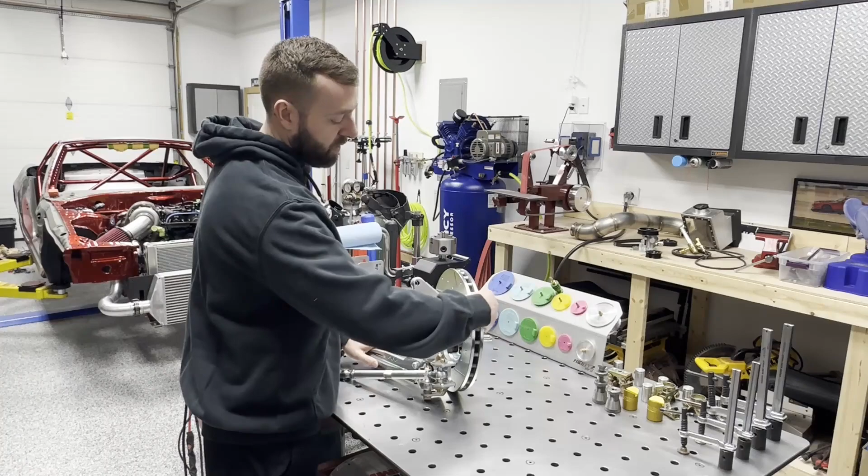So the configuration I have set up right now is an FTF angle kit with their 350Z hub bearing setup welded on there. When they designed this, they retained the factory caliper mounting location. So in theory, it should be identical to an RX7 FC knuckle and should work for both cases. The only difference being that the RX7 knuckle or spindle is a smaller hub diameter, so you'll have to run a hub-centric spacer. But in either case, I have both versions here, so I'll test both.

But the first step in new product development is we need to get all of our parts, and we need to get all of them scanned and into CAD. So I've got my assembly here, rotor onto the knuckle, and I'm going to scan this first, then I'll pull the rotor off, scan it again, and then I'll wait for those calipers to show up, scan those separately, and we'll get everything in CAD at once.

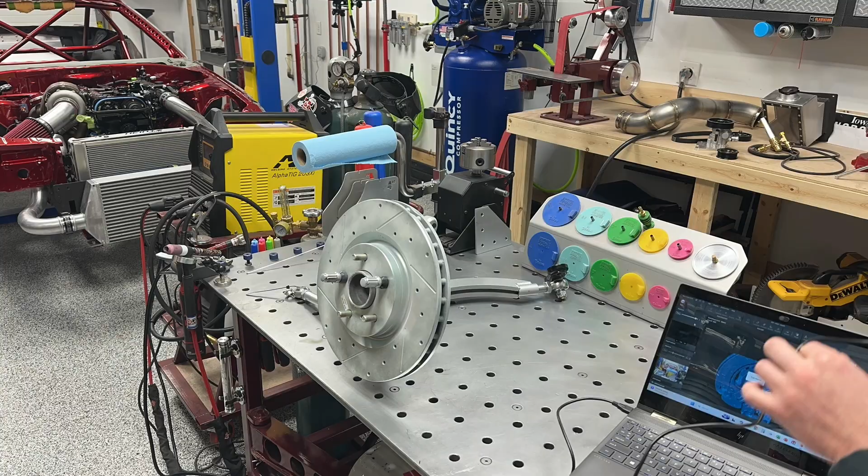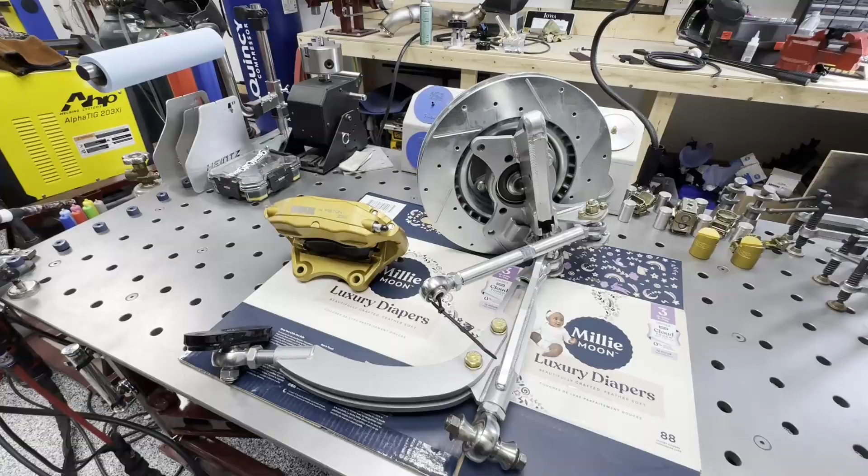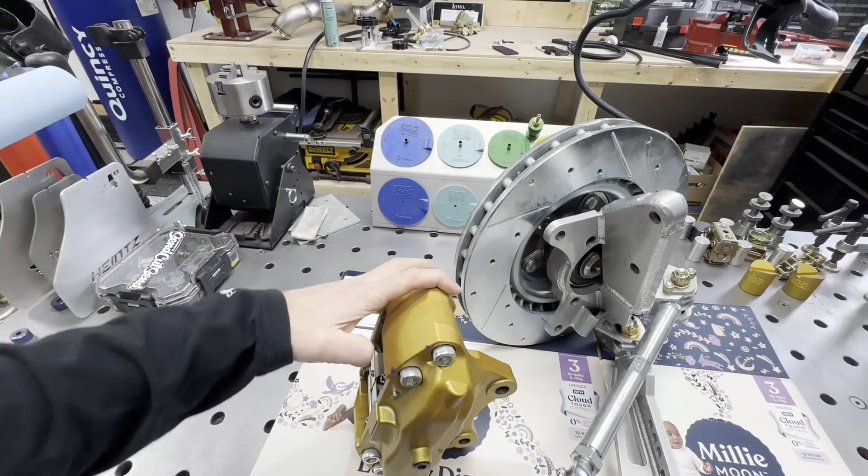We are back with some Z33 4-piston Parts Shop Max calipers, and I've already done a fit up, and this is just how new product development goes. Sometimes you have an idea and you don't know whether it'll work or not until you get into it, and that's where we landed here. My initial plan for these calipers, ignore that I've got the bleeder on the wrong side, was to try and get right in between the factory location.

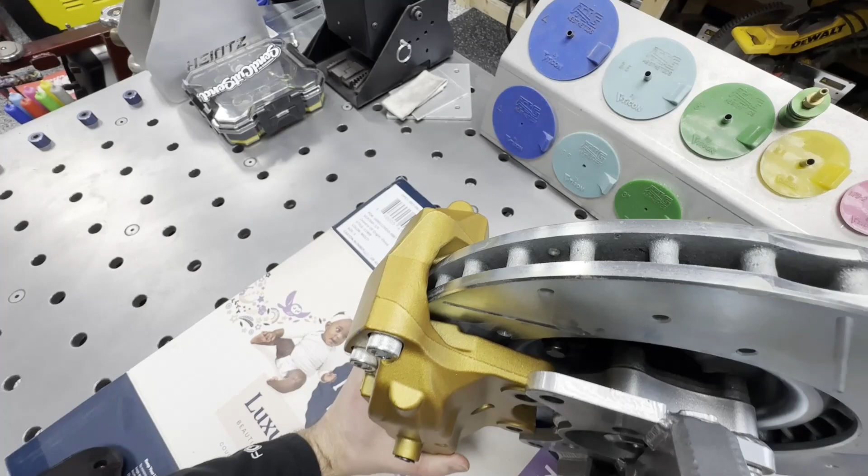My measurement was close just by pictures that I've seen, but it's not close enough. It looks like that's got quite a bit of pad contact, but it doesn't. There's still a fair amount, at least 1/4 inch or more. These have to be pretty recessed in there.

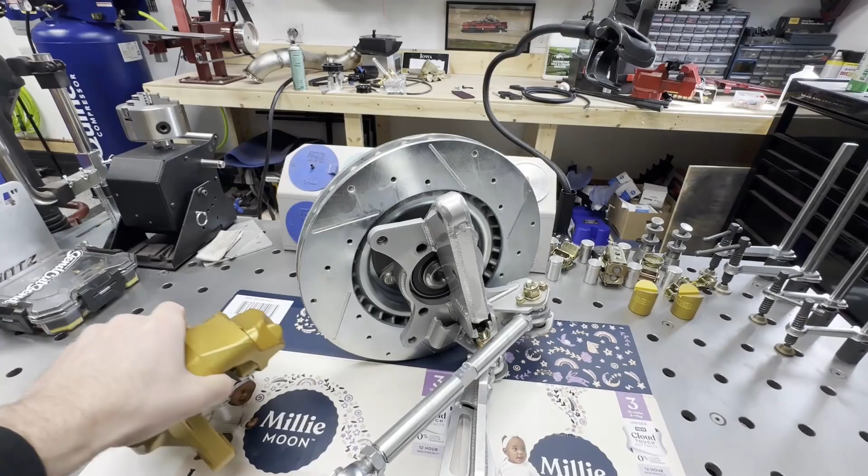So unfortunately, knowing this, I'm not going to be able to offer this to people with a factory RX7 knuckle. If there's not enough room to mount it using the existing brake caliper mounts, I'm kind of stuck. Thankfully, this is an FTF knuckle with a 350Z hub, and I have a couple of extra pickup points that I can use. So I'm not completely stuck, at least for this application, but when you lose 90% of your market because you can't use an OEM knuckle, you're kind of SOL.

So I think this will probably just be a personal project now. I have these calipers in order to develop kits for other chassis. But we're going to keep moving forward to figure out a solution since I already have all the parts for my car, and see where we land.

But what I'm seeing here is that I'm going to need to pick up on these two 350Z hub bolts, and the top one is very close to this wall and this weld. So that means I can't just pick up on those two.

This one would have a super thin wall with bolt hole tear out risk because of how close it is to that weld and how small that wall would end up being. So I can't just use these two. I'm going to need to add a third, I think just on the OEM location in between. So this is 3/8 plate.

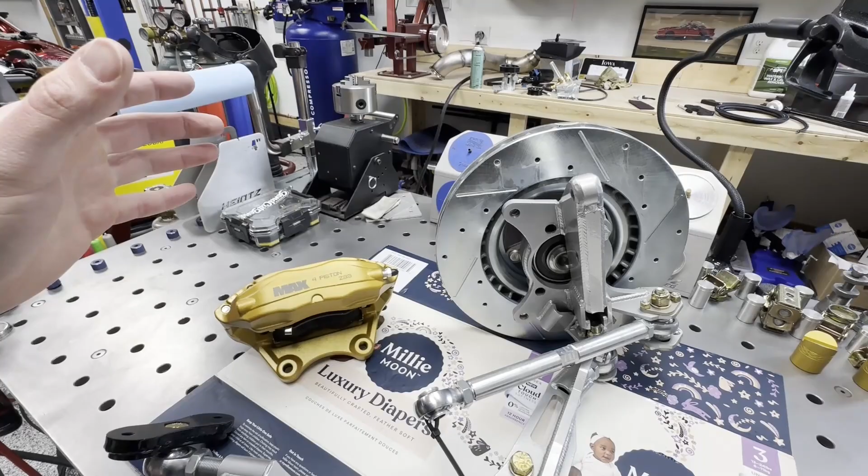I think what I'm going to do is find the perfect middle ground after cutting off this tab for clearance to get this thing where I want it, and then end up drilling and tapping an M12 by 1.25 somewhere in here.

So first step to figure all that out, where everything lands, whether I even want to come up versus coming down. I'm guessing in CAD it's going to be a lot more reasonable to bring the caliper up rather than down towards, you know, where things can possibly impact. So yeah, first step is just getting this thing all scanned up.

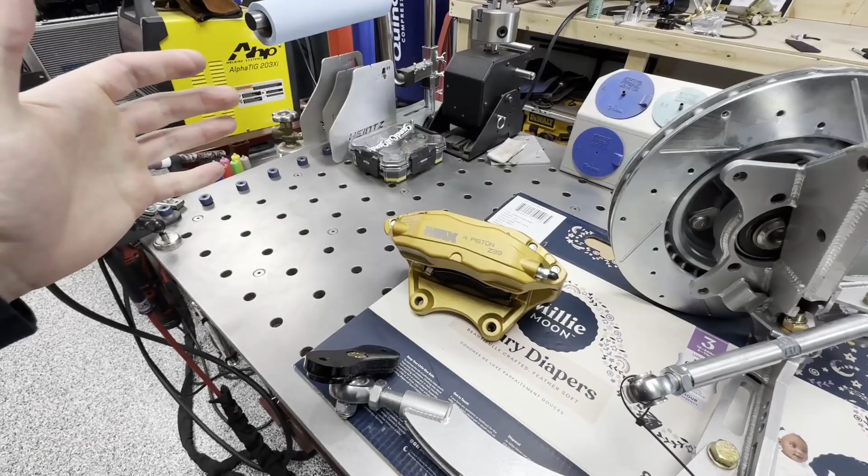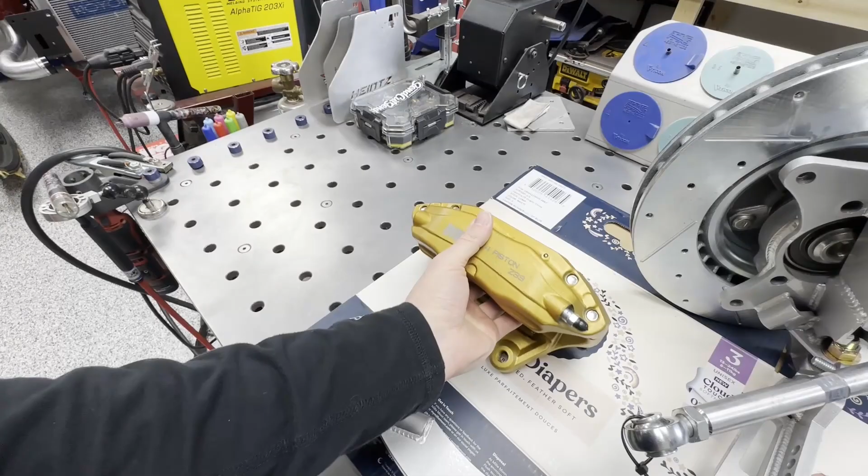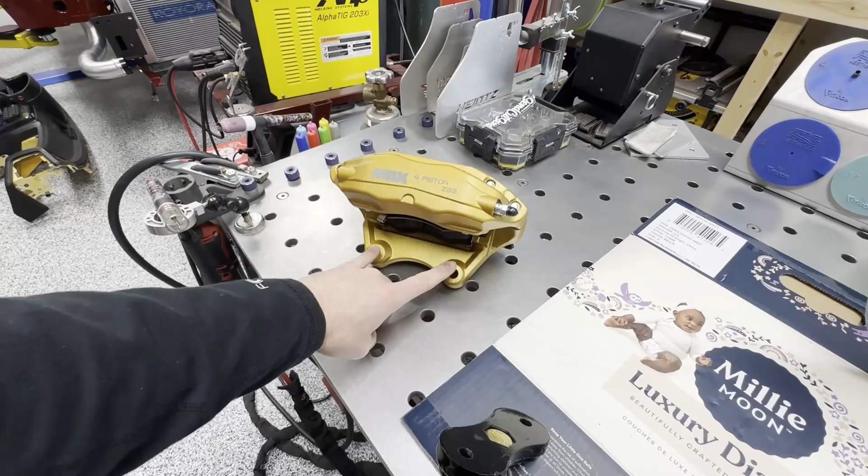And to save time, I'm not going to cover all of that in great detail, but for something like this that's fairly complicated, I'm not even going to spray this with 3D scanner spray, and I'm going to do it in at least 2, maybe 3 scans. First step is just positioning it to where I can see these 2 bolt holes. This is the thing I care about the most, and it's an easily identifiable feature for the 3D scanner.

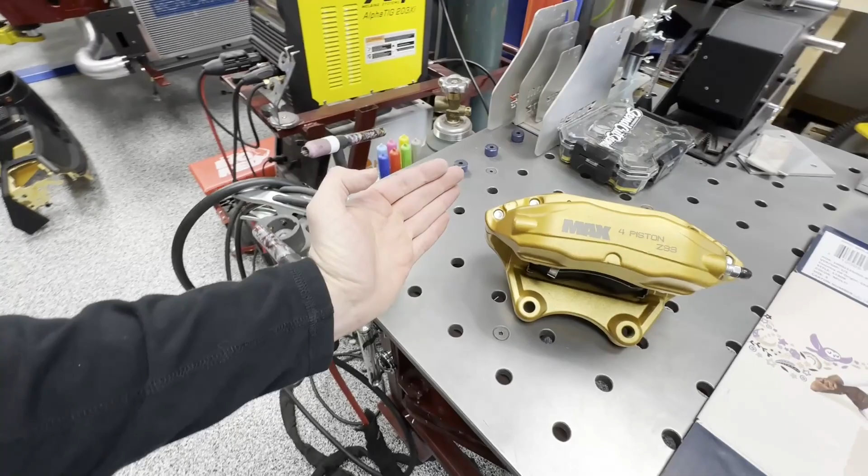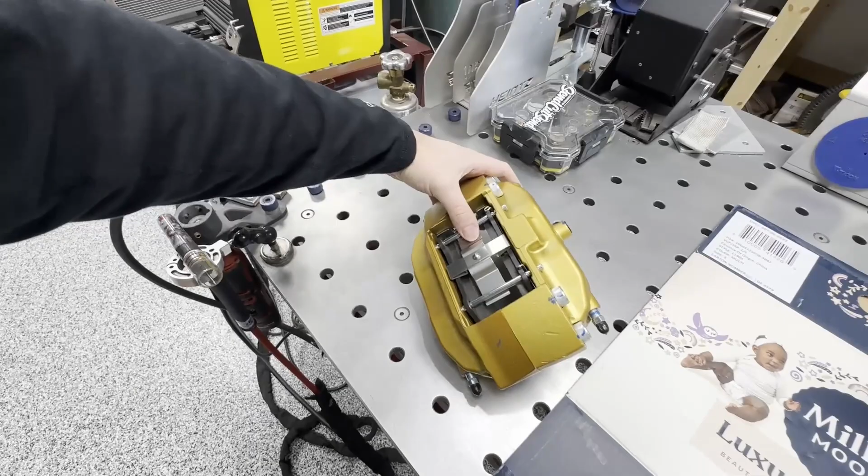So I'll scan this side and capture as much as I can in one pass like this, and then export that. I'll probably do the same thing from the back side. Come from here, trying to capture up and down and over, and then if that's not enough, I'll go ahead and do maybe one more, like this, where I can try and capture the overall width between the pads.

And then the way that I'll handle that in SolidWorks is on all 3 scans or 2 scans, I will put a boss that is located on these 2 holes. Then I'll align them with that. And I can create planes on both sides here and compare that to what it physically measures out at. That way, all 3 scans perfectly align.

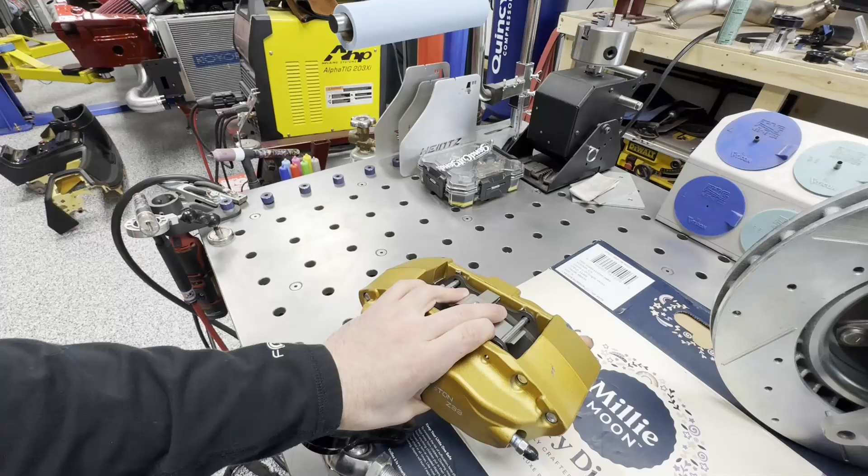Depending on the scanner you have, some of them offer excellent features to do all of that for you, but this is the nitty-gritty way of doing it to account for a cheap scanner. So let's get that scanned and figure out some solutions.

All right, we're now over to the PC. We've got our 3D scan of the caliper loaded in, and if you follow the feature tree on the left, you can see this is scan 1. And like I mentioned, I like to work with multiple scans on something like this. It's a cheap scanner. It works better when you just take a single pass from one orientation and stack your scans up rather than rotating the part around a bunch and relying on feature tracking. And I was struggling to capture it all in one scan anyway, so this is my process.

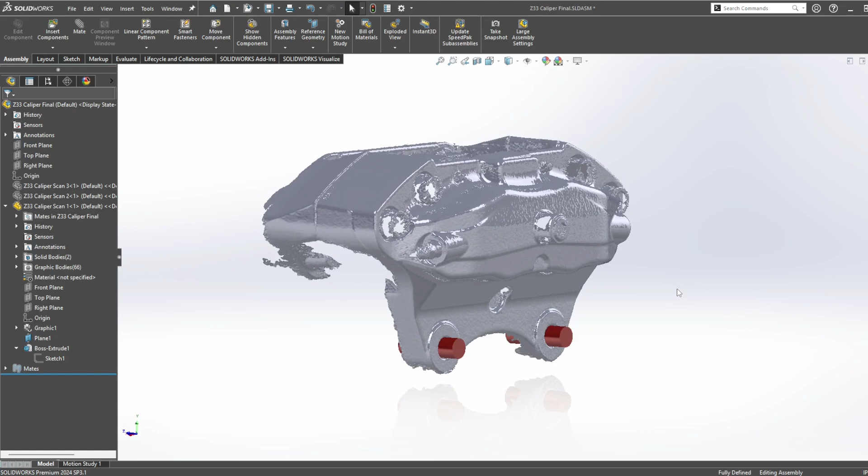So this is scan 1. I've got plane 1 here that I built onto this face, and then I built up my 2 extrudes to find the center point where I need to be bolting my caliper bracket to. And to do that, I had some subscribers let me know about this feature here, selection filters, toggle selection filters.

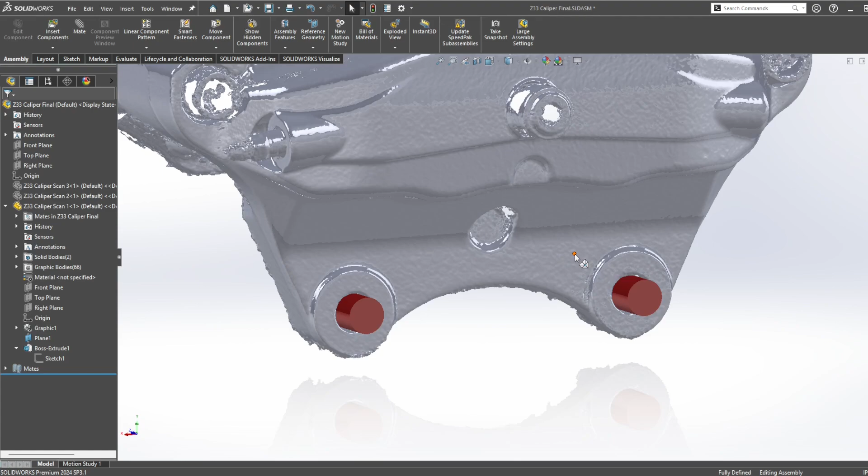And thanks to those folks who mentioned this, it allows you to pick up on all of the vertices on your mesh without having to use the ScanTo3D add-in in SolidWorks that I was previously using. And when you don't use that filter, it just pulls up as one selection box for the graphics body. So thanks to those who made that comment.

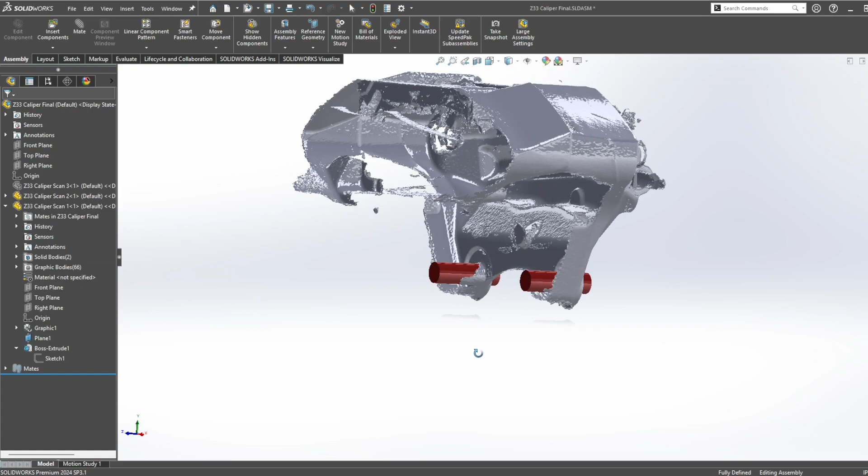So same process moving forward, scan 2, same thing, built out the boss extrudes and mated up concentricity mates on the cylinders and set the width of the caliper bracket to what I physically measured in person.

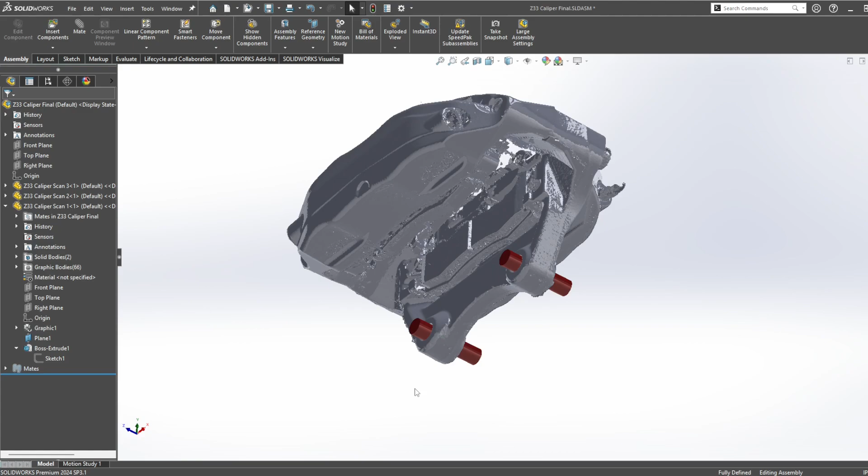And then scan 3 here, we just wanted a little bit more detail underneath the body to see a little bit more clarity on the width between the pads. So that's really it. As you can tell, SOLIDWORKS is kind of struggling with all of this mesh data, but we've got everything we need now to take those 2 cylinders and mate it up where we want on the knuckles. So let's get over to the knuckle scan and get that thing all loaded in.

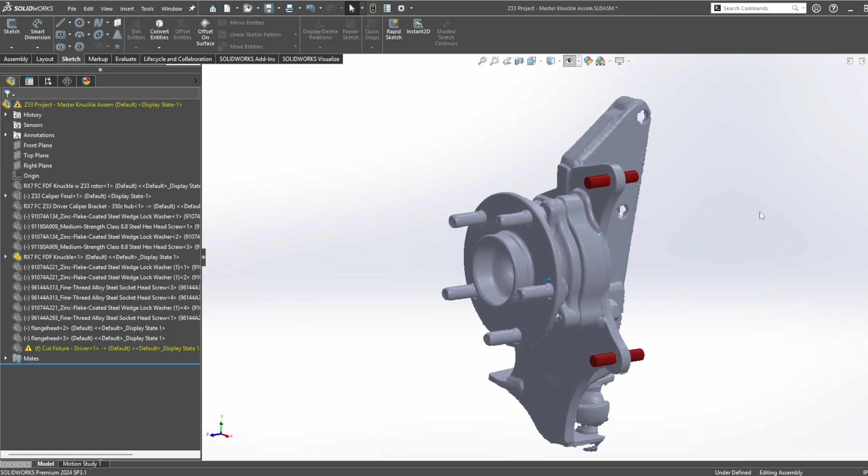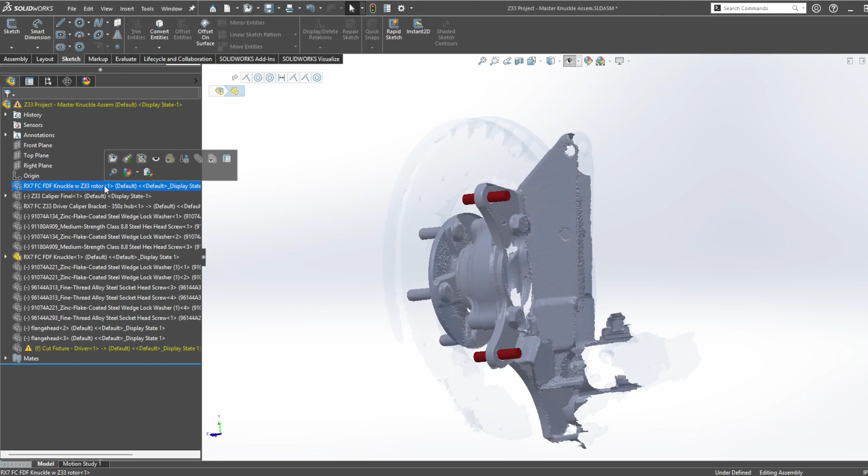All right, let's go through this master knuckle assembly and break it down step by step. Starting with the knuckle without the rotor. My primary focus for this scan is good scan data of the hub and the front side of the caliper mounting face. In the exact same way that we did the caliper, I'm just modeling in a plane and doing the boss extrudes on center line of the holes. Very simple stuff. Second scan, I'm focused on the back side of the knuckle and capturing all this data of the back side of the rotor.

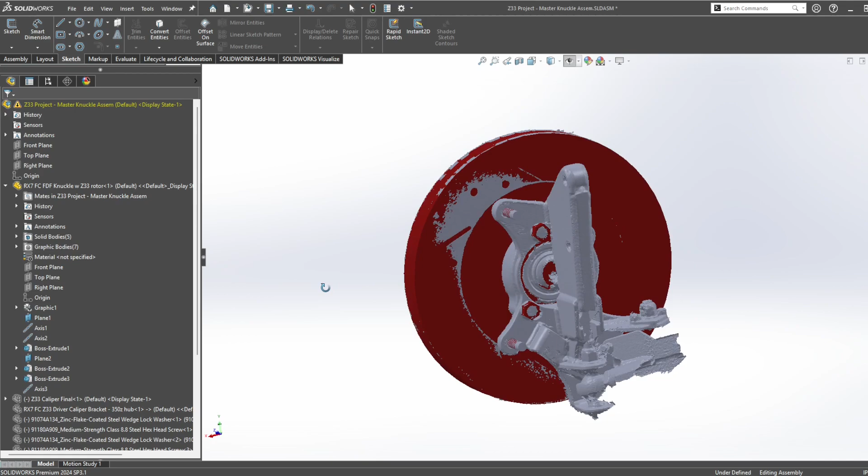And here you can see I modeled in some hexes to mimic the hex head bolts so that I could find center line of the wheel bearing mounting holes. And then lastly, I've got boss extrude 2 here. This is just mimicking the geometry of the rotor. So we've got everything we really need here. We've got the OEM caliper mounting bolts, the hub bolts, and the rotor modeled. So that's everything we need to start creating mates.

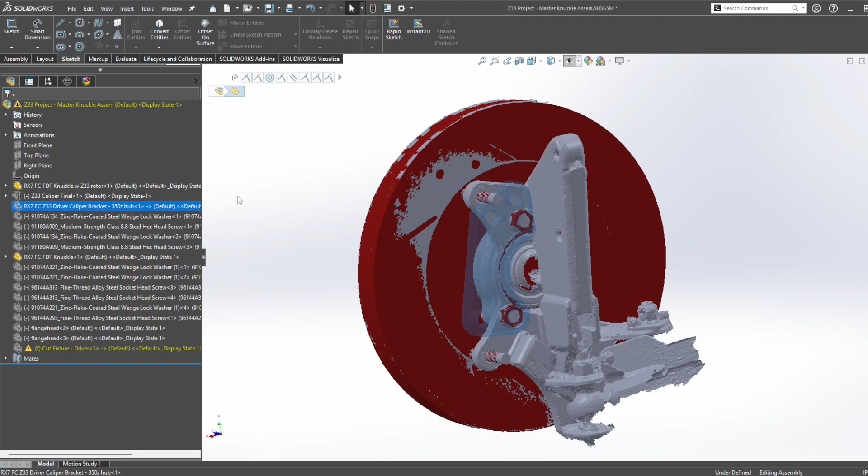So the next step you would think is to bring in the caliper, which is what I thought, as you can see by my feature tree, but really the next best step was to bring in the bracket itself. So here I'm creating this bracket based off of stuff we already know. We know the distance between the hub bolts. We know the distance between the caliper bolt holes. And so I just did an educated guess to figure out where those go. And I did them based off of the center origin of the sketch.

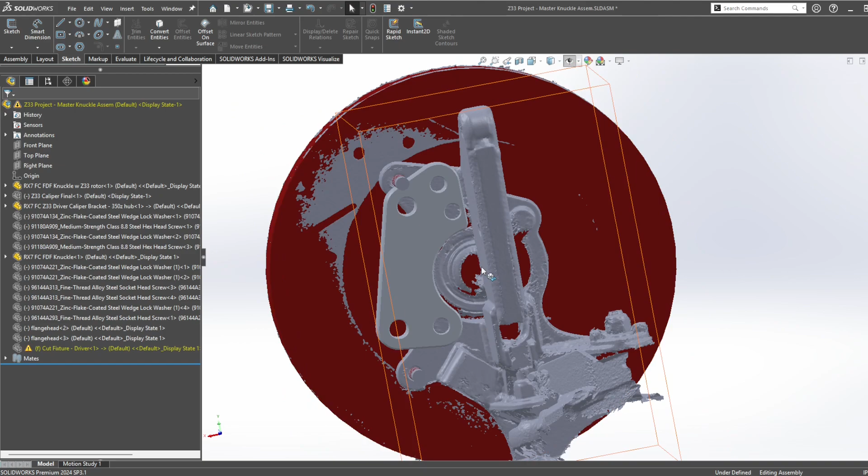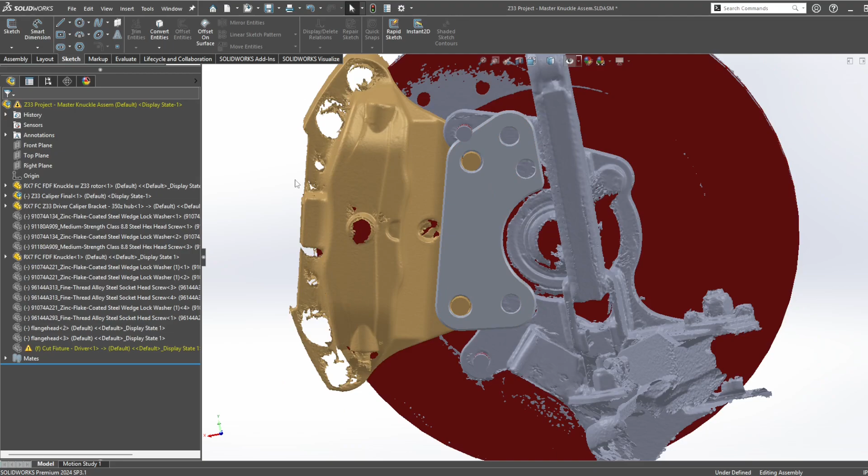And so when I created this circle here, I created it off of center of the sketch, and I made a concentricity mate between that face and this face so that I could keep everything concentric. That allows me to, when I put the caliper on, just keep zhuzhing these distances over until I got proper pad contact, but the pad contact is uniform on the left or right side because it's all symmetric and based on this concentric mate. So kind of difficult figuring all that out, but really that's the right order of things for me to get this right.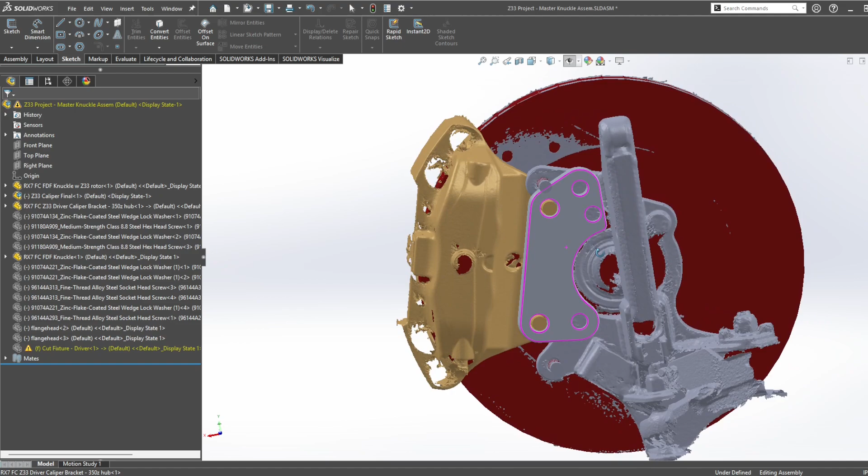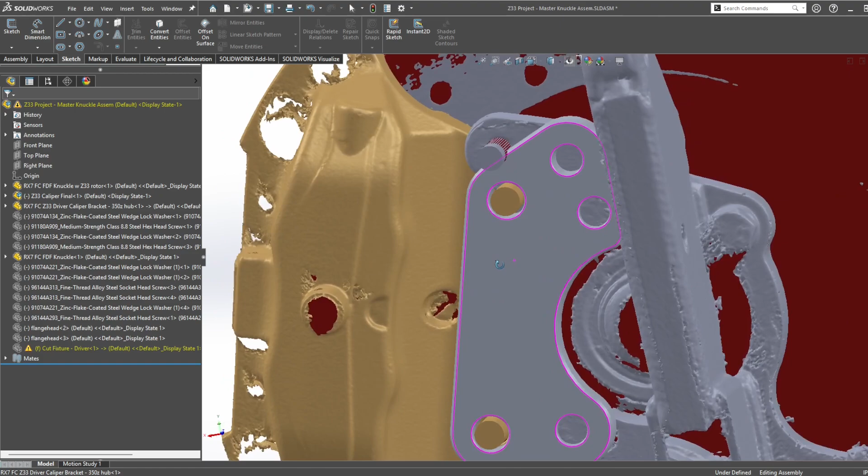Couple issues here. This one is that there's a weld right here next to the bracket, and it makes it so that this wall is super thin. And because of that, I've got a third hole that I'm adding here where I'll just drill and tap into the existing flange to try and give it some more strength. But really, that's it. It wasn't a crazy complicated process. If I hide that other scan, you can see a little bit better where I'm going to have to modify the actual knuckle to remove material.

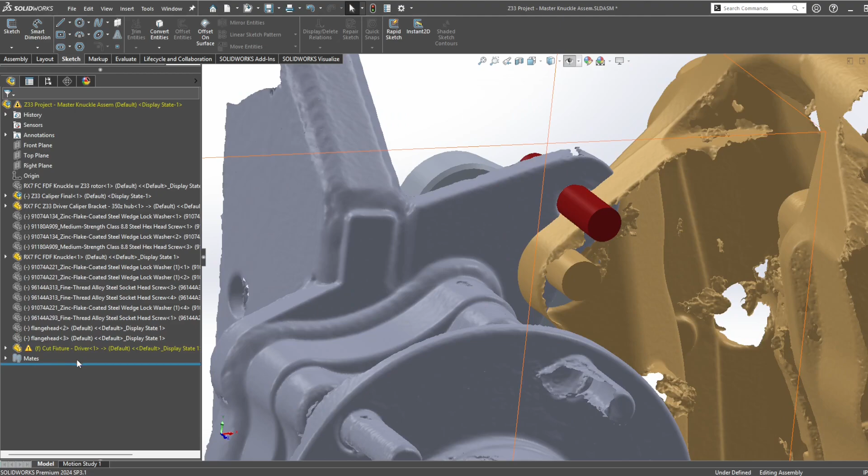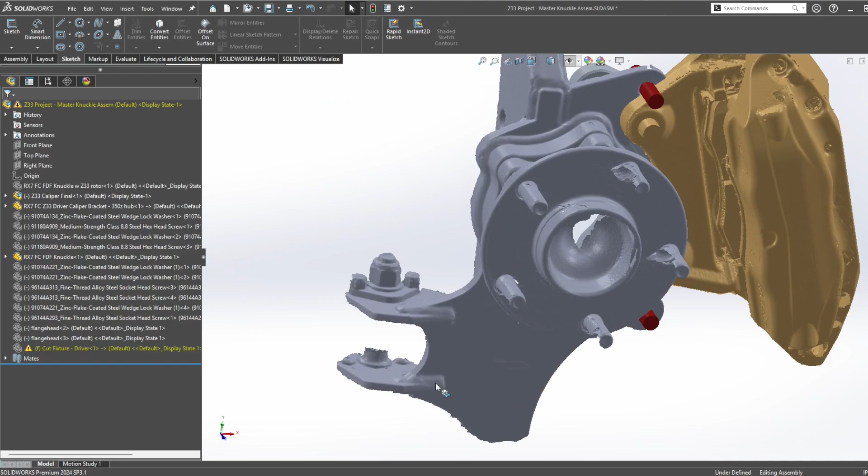So if I show you guys the cut fixture, the cut fixture is just something I mocked up quick to show you where I plan to cut material. So I'll 3D print that and it'll allow me to scribe a line and know exactly where to cut so it's not too little, not too much material. And away we go. So that's really it, guys. It looks super simple. It's not. It takes some time to figure out, but this is the broad description of what it takes to model something on a bunch of assembled scans together.

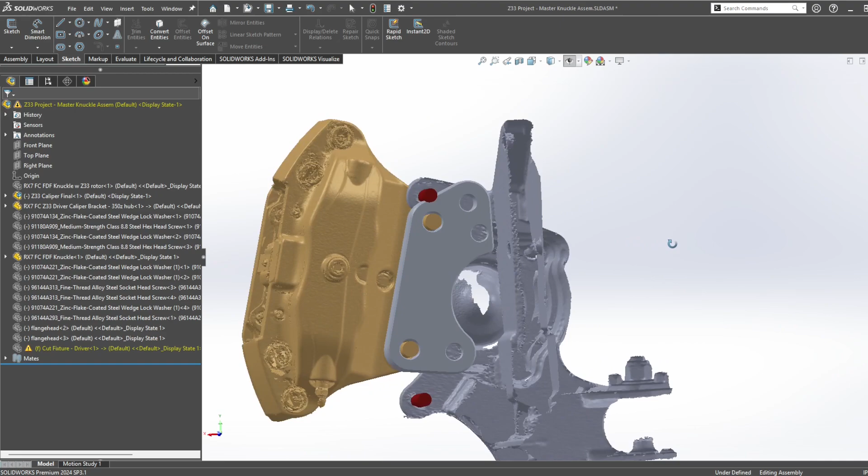So let's go ahead and get these things 3D printed and mocked up on the knuckle, because this is a solid Rev A. I think this will probably be pretty close to what we want. So let's see where this thing lands when we get actual parts mounted up. So we've got our design finished up. We've got our 3D prints printed. First step is a cut fixture.

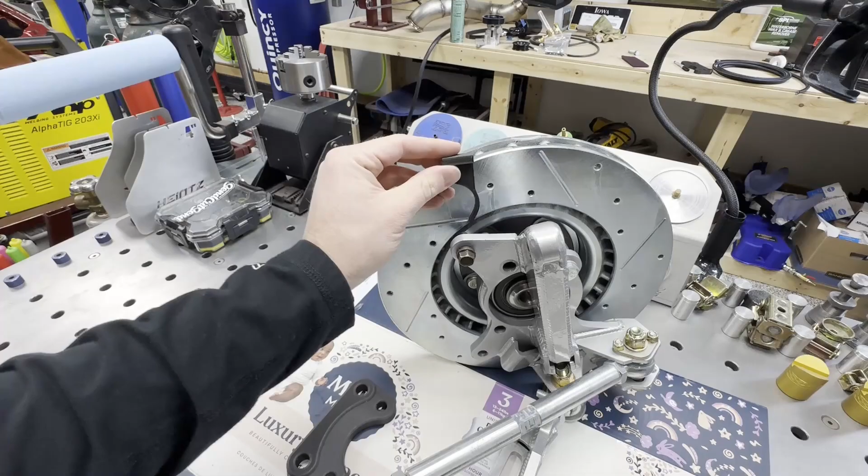So I've got this little guy. It's pretty crude, but it should give me exactly what I need. It should be not too little and not too much clearance for the Z33 caliper. So I've got this little radius that just maintains concentricity on the bolts, and then the flange lines it up exactly where it needs to be.

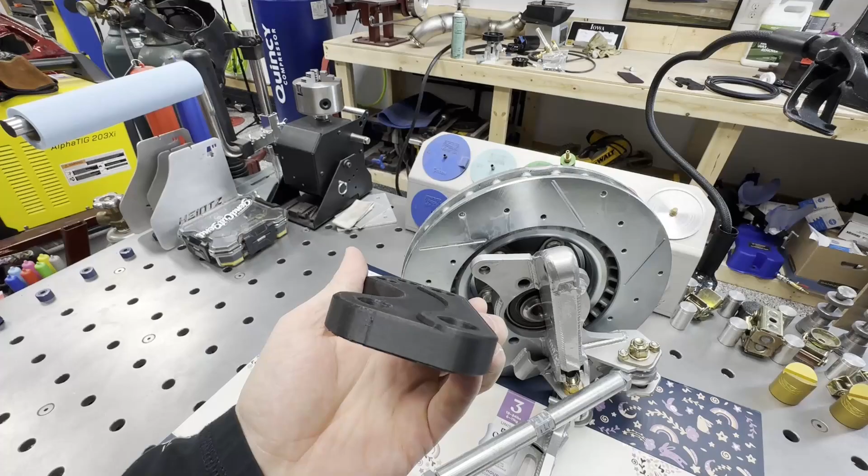So I need to find an M12 for that little cut fixture first. But once this is cut where it is needed, I've got my 3D printed prototype. You can see it really didn't need to be that offset from where the OEM flange was. And you can see how tight this thin wall is. So that doesn't matter just for fit up, but it will matter for getting this thing on the road.

So first step is, after that's cut, mount these onto the hub bolts. If that shows me that the caliper is positioned correctly this way and this way, then V1's done. And I'll go back and scribe my line for this third hole and drill and tap that M12 by 1.25. But it's rare that V1 works. So let's go ahead, get this thing cut up, and we'll see where it lands.

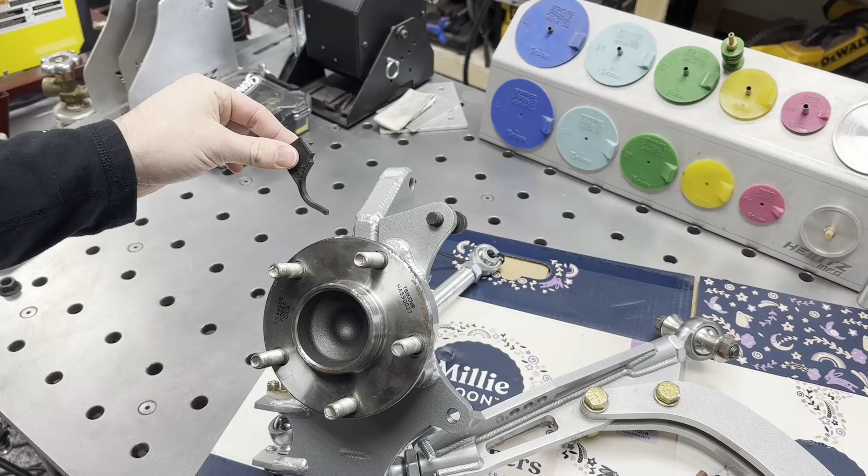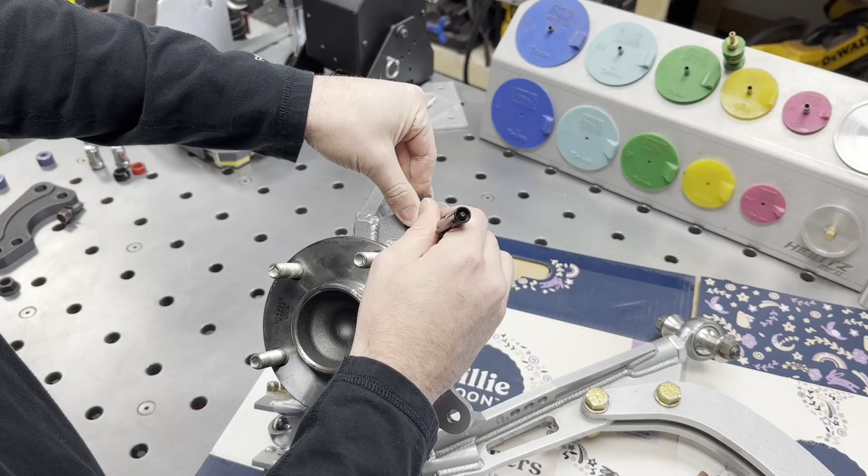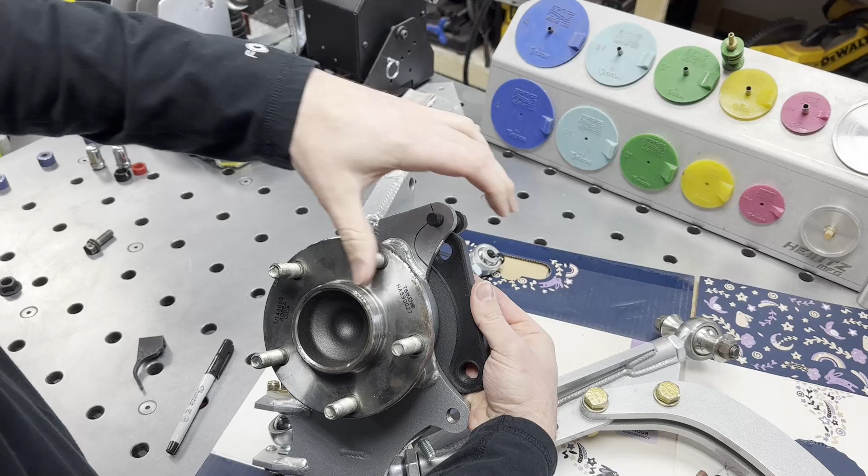So I found a bolt that fits. It wasn't actually M12 by 1.25, but this should be everything we need to get our line traced out. So that should be it. That's our cut line, and how much material needs to be removed in order to get this bracket enough clearance to move in there and position the caliper where it's needed.

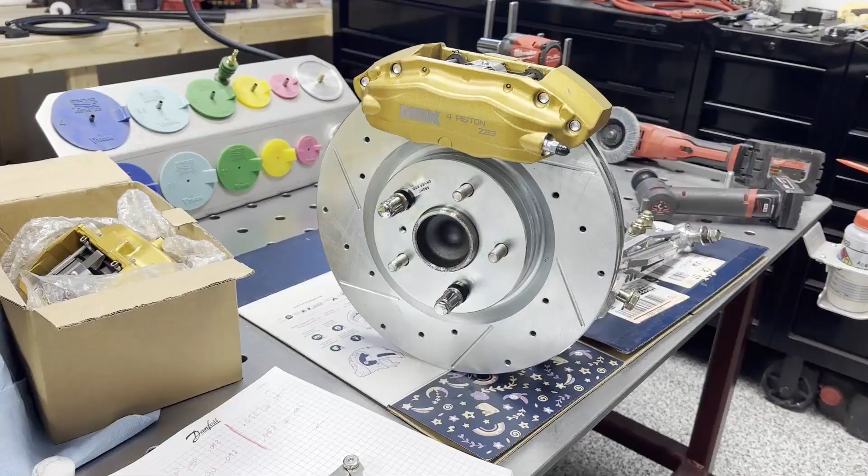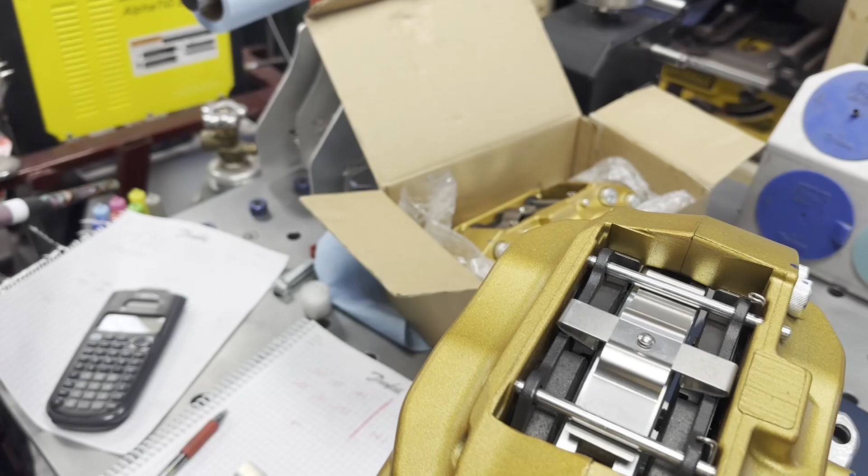There it is, Z33 Track Edition calipers on an RX7 knuckle. And V1 turned out super good, and I think it's nearly where we want it. There is one issue that I noticed, and that is that the distance between pad to rotor is not equal on both sides. So we're not quite center line of the rotor.

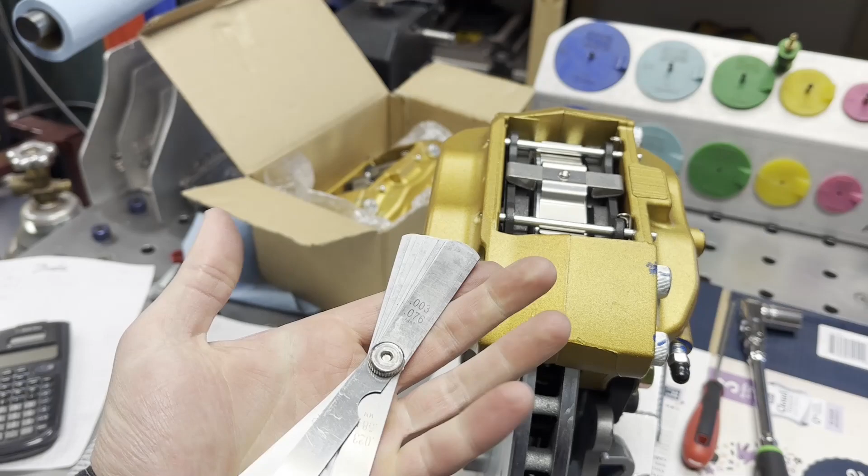And that's to be expected. Those are minor discrepancies in the scans on the model. And if that's the only thing, that's awesome. You know, that's a super cheap scanner and real close to perfect right out of the gate. And the thing that I use to establish perfect center line is feeler gauges, and I measure the casting.

So these are die cast aluminum. They're not finished machined down here where you see that light. And so they're not perfect, but that's more what I'm using rather than the pad to determine center line. I am also looking at pad, but I care a little bit less about that.

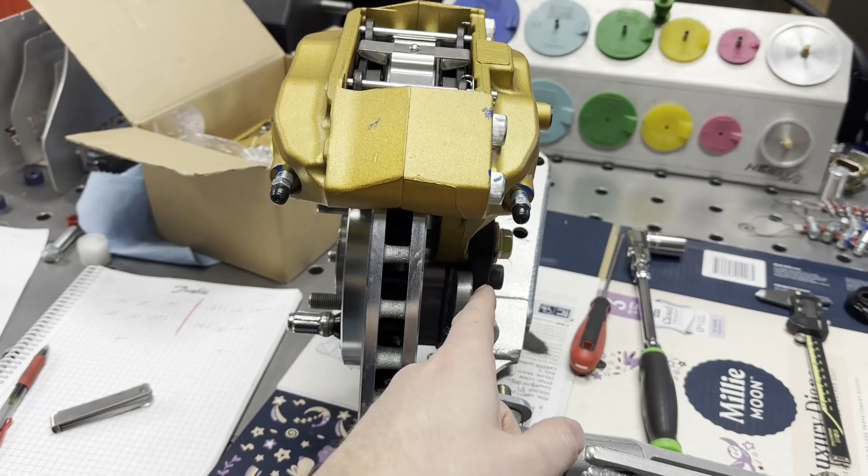And one thing that I did was I put the other caliper on this setup already, and I measured at those 4 corners and determined what the average was. So I need to move the boss on my bracket to the left 20 thou to get perfectly on center.

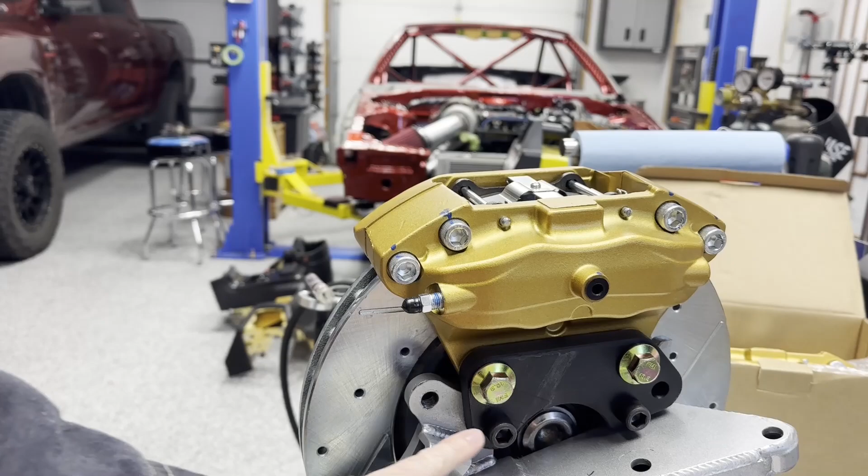And that's really it. I don't think there's anything else needed for the bracket unless I wanted to pick up on this OEM location. I did determine these are M12 by 1.5. The hub is M12 by 1.25. This would also probably need to be a socket cap screw. Might be kind of annoying having interchangeable thread pitch, and it's not totally necessary to have that other one, but it would kind of provide some symmetry in the design and look a little bit better.

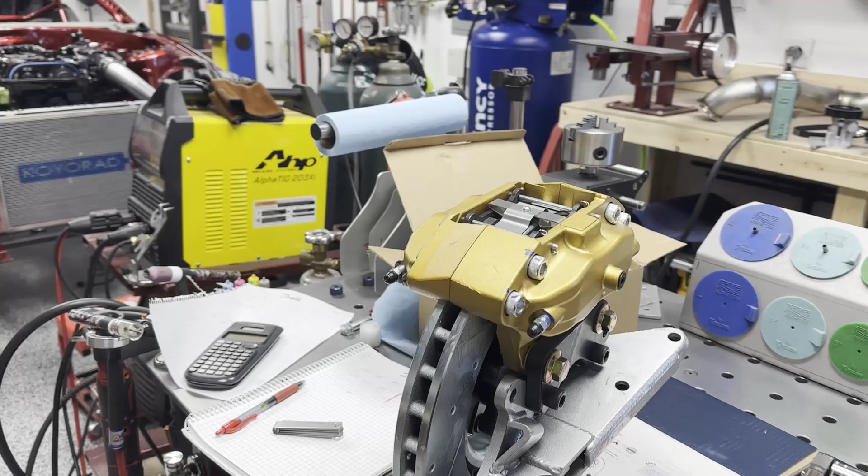It probably wouldn't cost that much to add this little piece. So I might just go ahead and add it, especially since this is just a project for me and it's my cost, not the customer's. So really, that's pretty awesome for V1. So now we're going to move on to CNC machined, but from a design standpoint, that's really it, guys.

All right, guys, that does it. This is new product development in a nutshell. Taking your raw components, 3D scanning, 3D modeling, then 3D printed rapid prototypes so that you can move on to CNC machining production. And that's a good look behind the scenes for some of the type of stuff that I do for my business, as well as for apparently personal projects. But that's the way new product development goes.